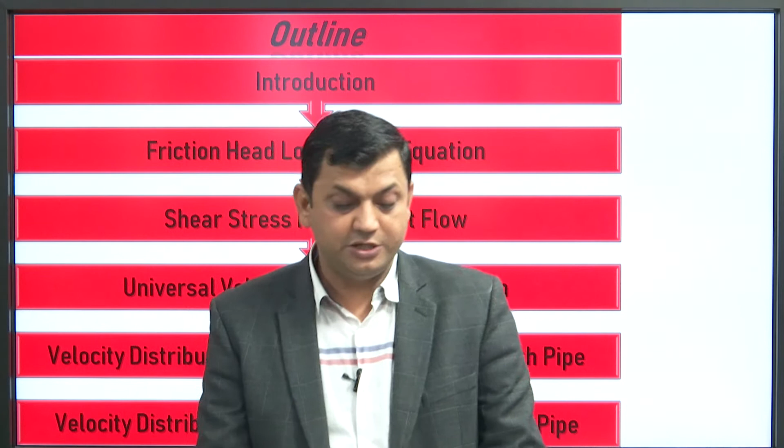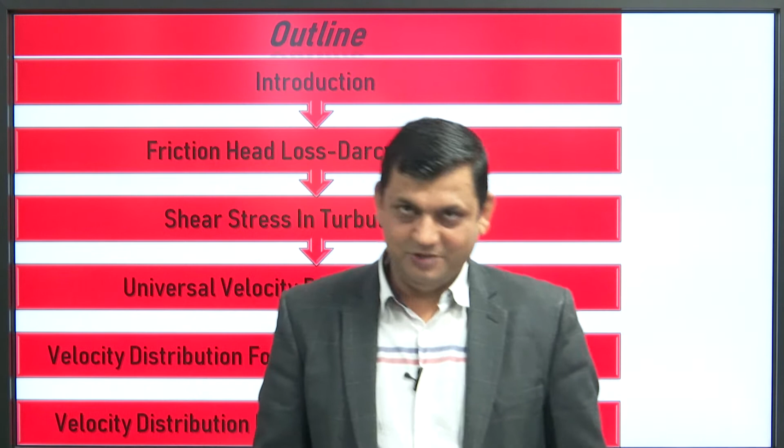Then the shear stress in turbulent flow. So many models exist, like in viscous flow we have Newton's law of viscosity, tau equal to mu du upon dy. In a similar way, we discuss what is the shear stress in turbulent flow.

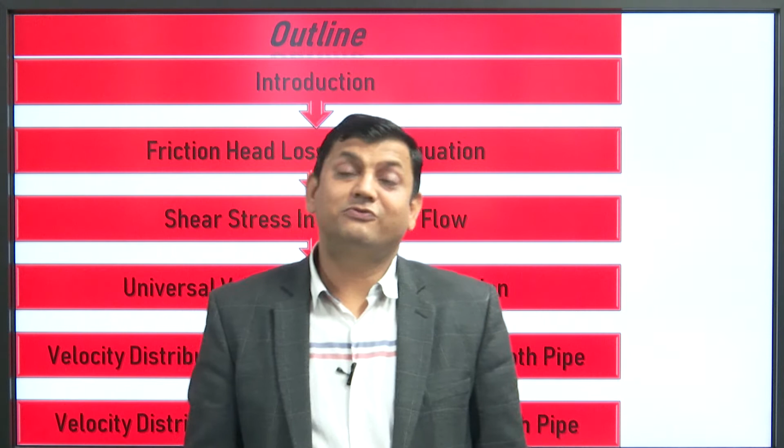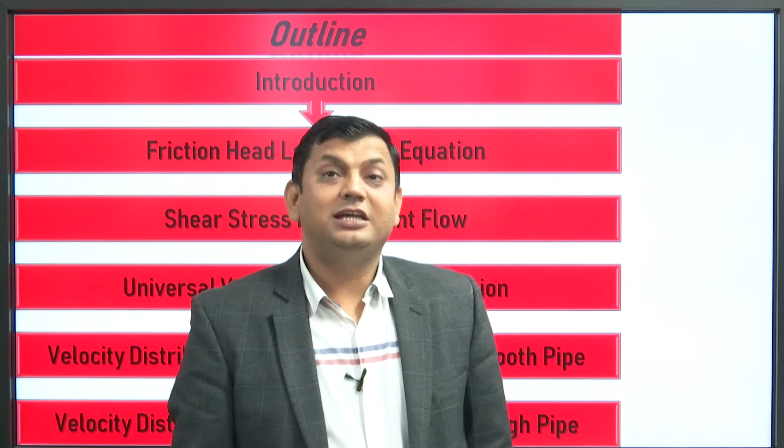Then the velocity distribution. So what is the universal velocity distribution for smooth and for rough pipes?

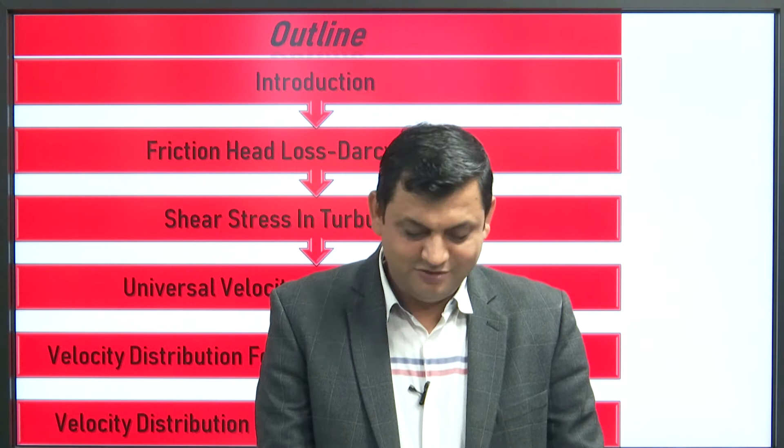In turbulent flow, fluid motion is irregular. In kinematics we discussed what is laminar and turbulent flow. We can say it is like a zigzag, like flood water, in turbulent flow. In laminar flow, the motion is a straight line along the stream, but in turbulent flow the motion is irregular.

So there is complete mixing of fluid. Why is there complete mixing? Due to collision of the fluid masses with one another.

Fundamentally, on the basis of Reynolds number we can categorize the nature of the fluid as laminar or turbulent. It is seen that up to 2000 or 2300 the flow is laminar, when talking about fluid flow in pipes. On the other hand, between 2300 or 2000 up to 4000 is some transition state - we cannot say for certain, sometimes it behaves like laminar, sometimes like turbulent.

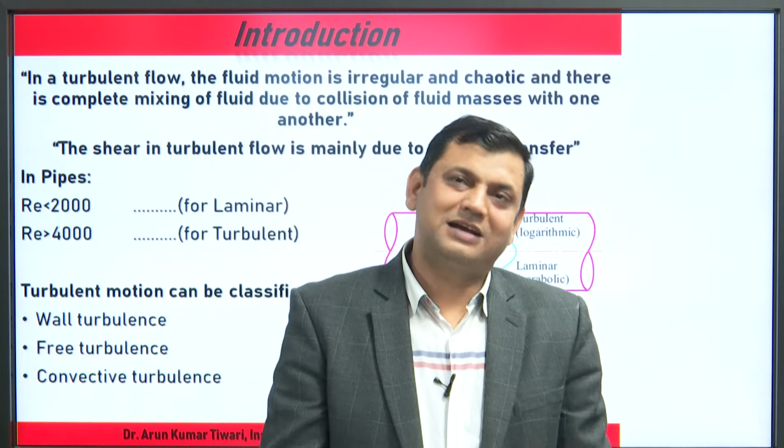In laminar flow we had a detailed discussion on the velocity distribution, which is parabolic in nature. At the center the velocity is maximum, at the boundary it is zero. We derived u equal to u max times 1 minus r upon R square, and u average equal to u max upon 2. We have solved some numericals using these fundamental equations.

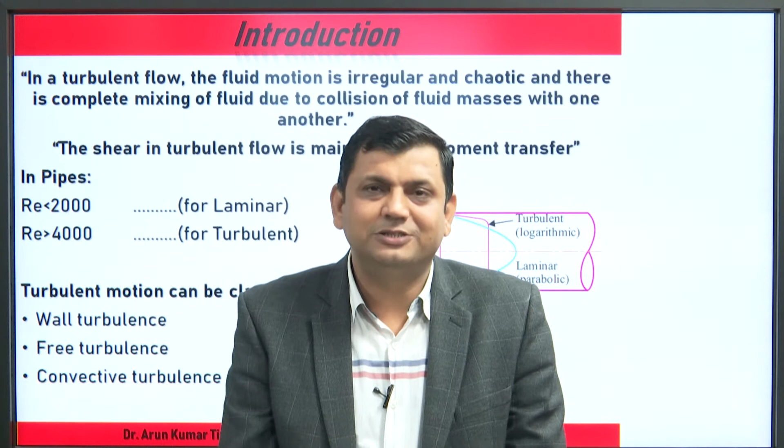Let's take the example of fluid flow through pipes. If you see the velocity distribution for laminar flow, at the boundary it is zero, maximum at the center, forming a parabola - u maximum, and the nature is parabolic. So this is the velocity distribution of laminar flow.

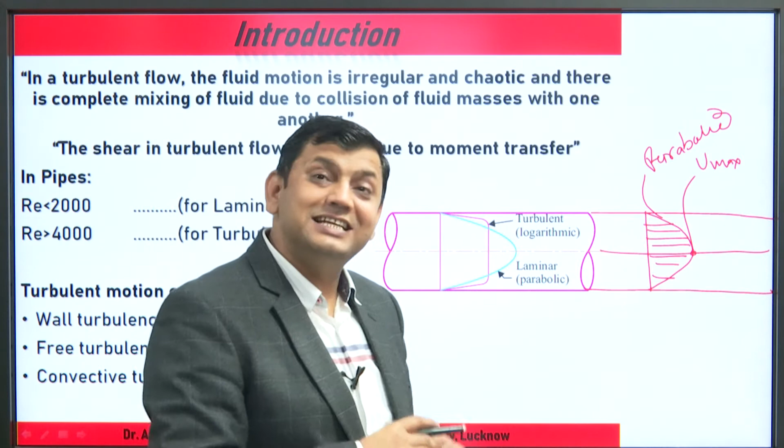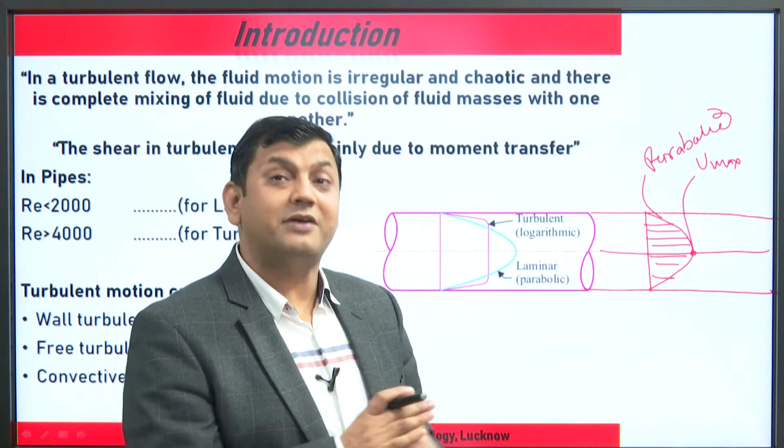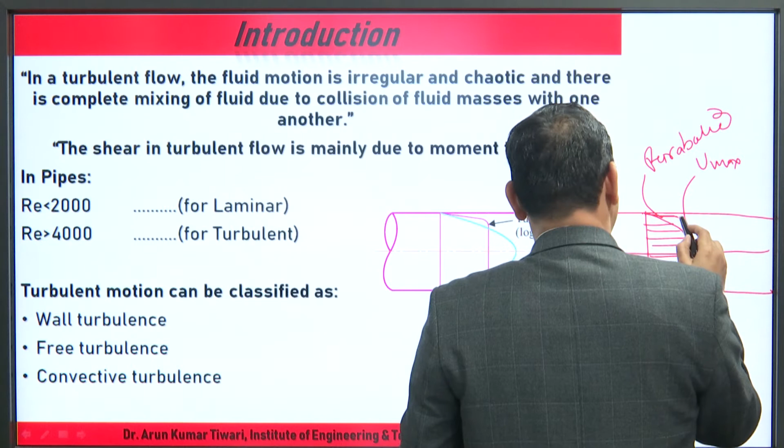What about turbulent flow? The nature is different - it is logarithmic, and depends upon the power law, y upon delta to the power 1/7th. The profile is flatter, not like the parabola. So this is the turbulent velocity distribution - flatter, following the power law, and logarithmic in nature.

So this is all about the velocity distribution of laminar and turbulent flow. Turbulent flow means zigzag motion with complete mixing. Very few real examples are laminar; in real practice, most of the flow is turbulent.

So on the basis of Reynolds number, which is inertia force upon viscous force, Reynolds decided this. Reynolds number is rho v d upon mu.

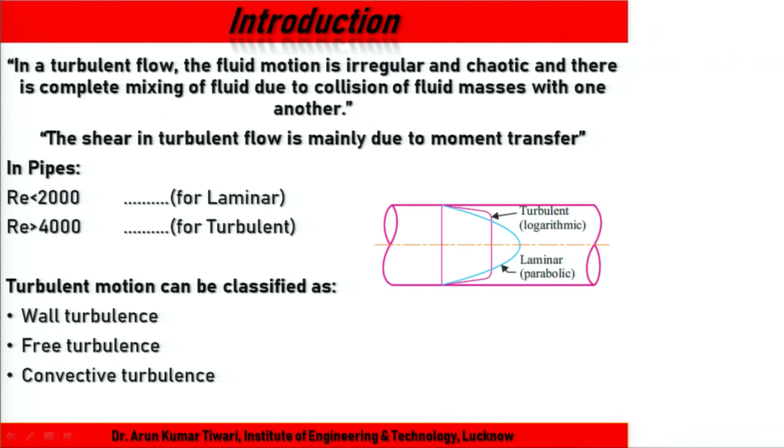If Reynolds number is less than 2000, then the flow is laminar; otherwise, between 2000 and 4000, this becomes the transition state - we can't say definitively which it is.

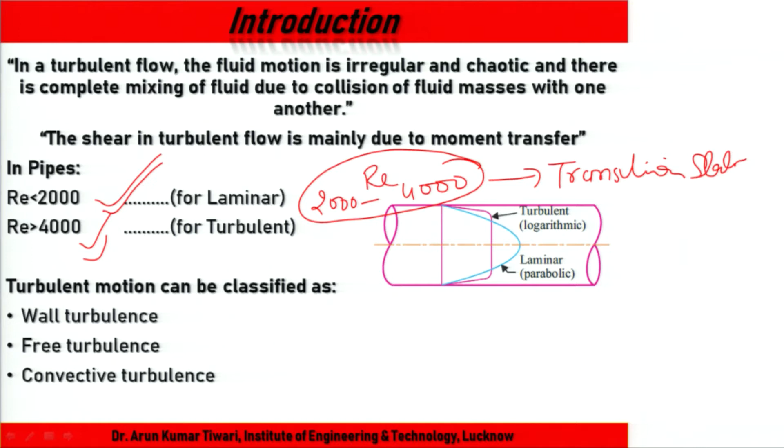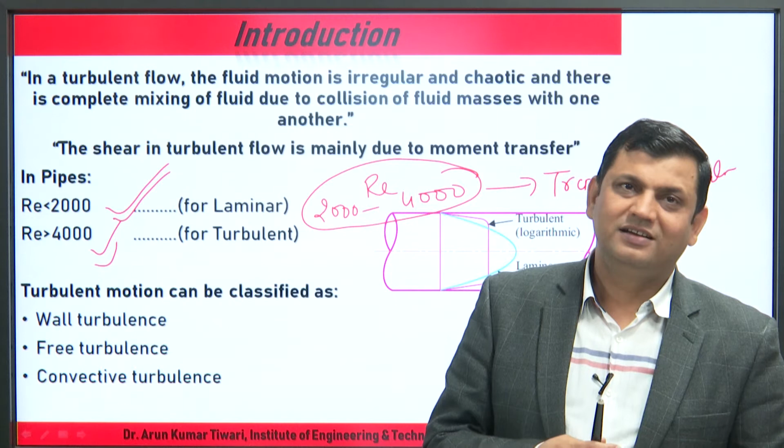When talking about turbulent motion, there is wall turbulence, at the wall level, and free turbulence, where mixing takes place. There is also convective turbulence, where conversion actually takes place - potential energy changing into kinetic energy. So these are the types: wall turbulence, free turbulence, and convective turbulence.

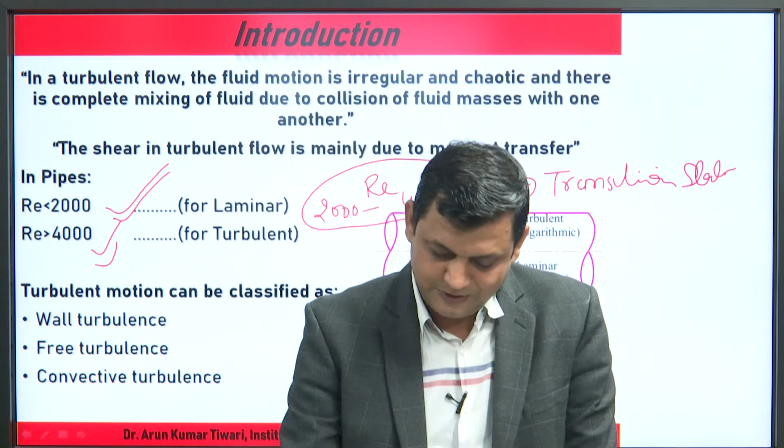If fluid flows through pipes, there is frictional resistance, and it is seen that it is proportional to V power n. What is n? It depends upon the surface material. In case of turbulent flow, n varies from 1.5 to 2, so the coefficient of V power n varies. The frictional resistance HF is proportional to V power n, but in case of turbulent flow, it is not simply V power 2.

It depends upon the surface area, but is independent of pressure, and depends upon the contact surface nature.

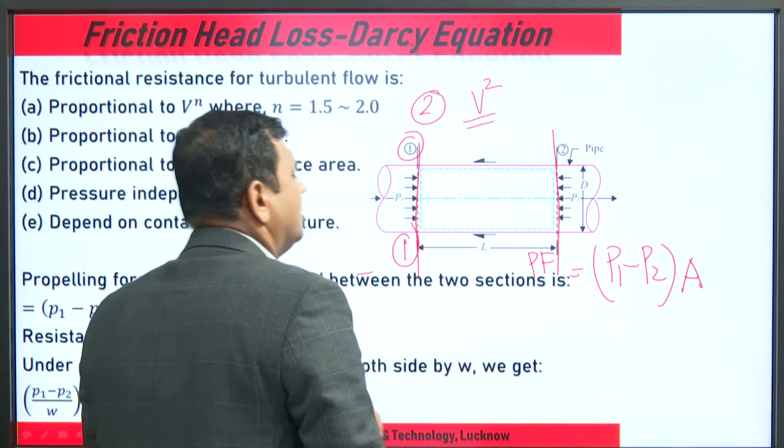What is the propelling force? It is P1 minus P2 into area, A. This is the propelling force of flowing fluid between two sections: P1 minus P2 into A, the area of cross section.

This propelling force is balanced by the resistance force, and the resistance force comes from friction.

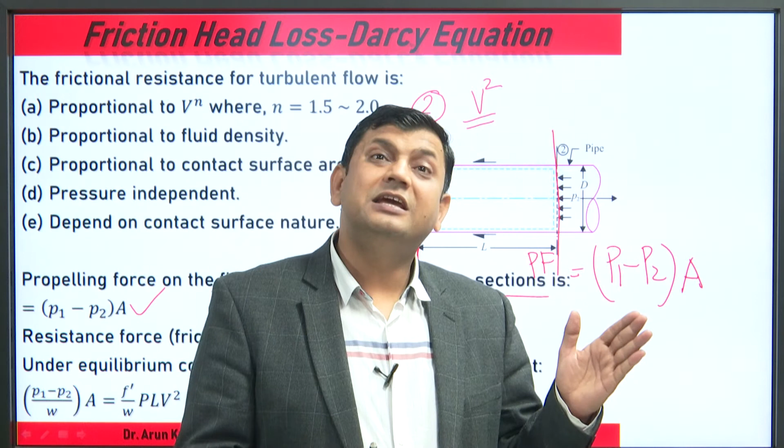This resistance force equals F dash, a non-dimensional term which depends on the nature and material of the pipe. The resistance force also depends on P, the wetted perimeter.

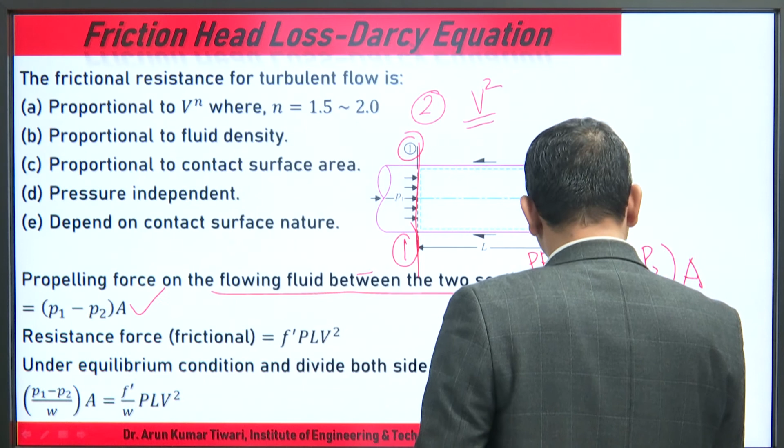So the resistance force is proportional to, or we can say equal to, F dash into P (wetted perimeter) into L (length of pipe), and in case of turbulent flow, into V square.

What is F dash? It is without dimension. So one force is P1 minus P2 into A, and this is balanced by the resistance force. Under equilibrium: F dash P L V square. This is the fundamental equation, equation 1.

In equation 1, one term is the propelling force, and the other term is the resistance force.

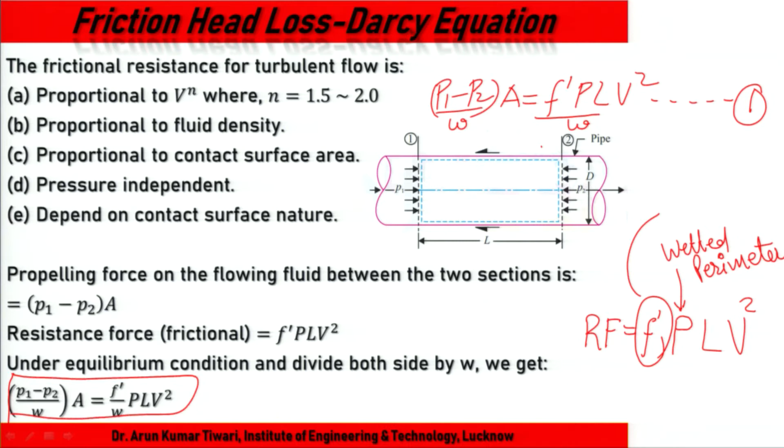This is very fundamental, so we move forward. Before that: P1 minus P2 upon W into A equals F dash P L V square upon W.

Again we can write: P1 minus P2 upon W equals F dash upon W times P upon A, times L V square.

This term P1 minus P2 upon W is the head loss, HF. So the head loss HF equals F dash upon W times P upon A, and we write this as HF.

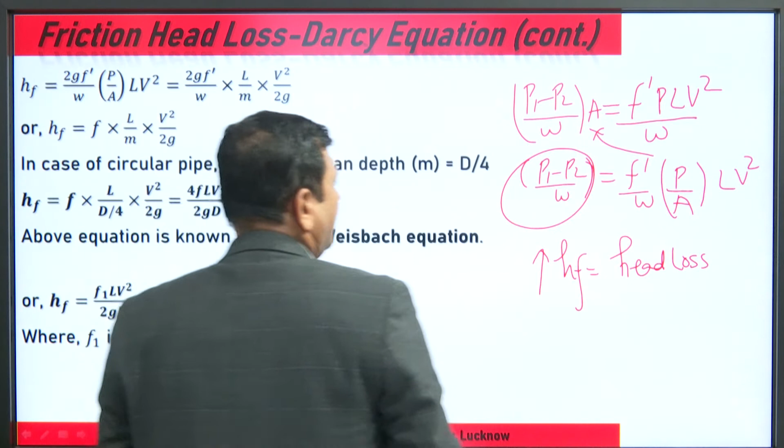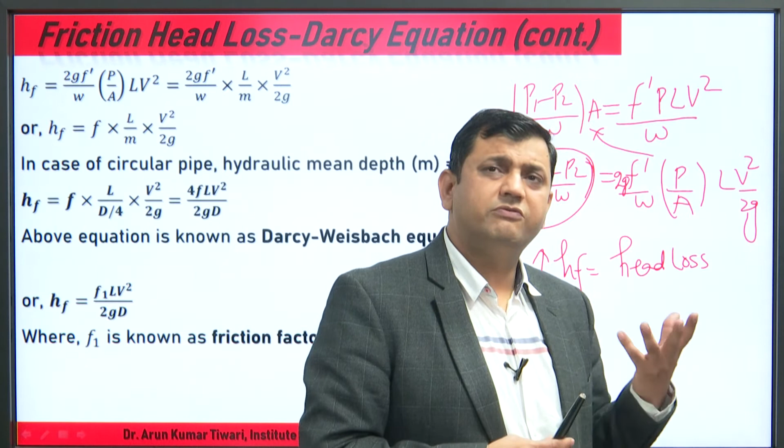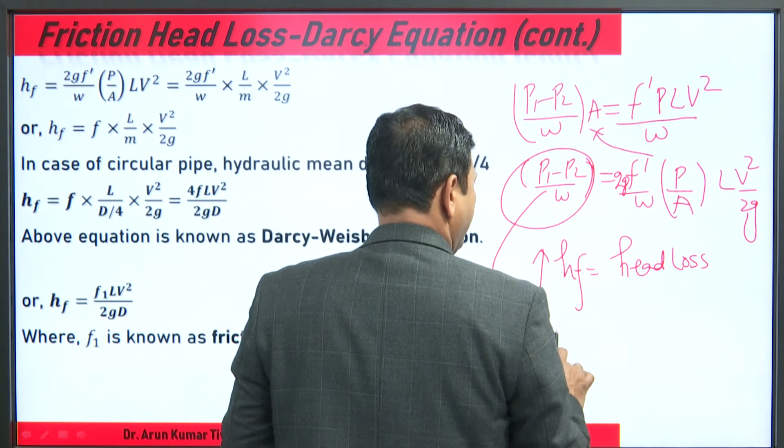Now we multiply and divide by 2G. Why like this? Because V square upon 2G, from Bernoulli's equation, is the form of the velocity head. So dividing and multiplying by 2G, we can write HF equal to 2G F dash upon W, P upon A, L, V square upon 2G.

This component, wetted perimeter upon area, is very important. We define this as M, the hydraulic mean depth: A upon P. For a circular pipe, A is pi by 4 d square, and the wetted perimeter is pi into d. The pi cancels, leaving d by 4, so the hydraulic mean depth M equals area upon wetted perimeter.

This, M, is the area upon wetted perimeter.

So, this value m: we can write P upon A, because A upon P becomes m, and reverse of that, P upon A becomes 1 upon m. So we can write L upon m, because L and 1 upon m become L upon m, and all the equation remains the same.

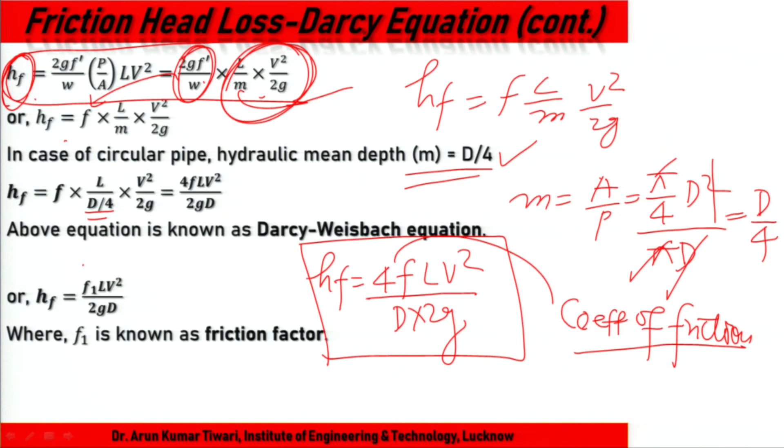And what is F? F is the coefficient of friction. In this equation, F is known as coefficient of friction. Sometimes in numerical problems, this coefficient of friction is replaced by friction factor. If this 4F is replaced by F dash, any F, then this F becomes friction factor. So sometimes in place of 4F we write F: F L V square upon d into 2g. This F becomes the friction factor.

We use this equation for calculating major losses in fluid flow through pipes. When fluid is flowing through a pipe, there are so many losses that occur. This major loss is due to friction, and this friction loss is calculated by the Darcy-Weisbach equation: HF equal to 4 F L V square upon D into 2G.

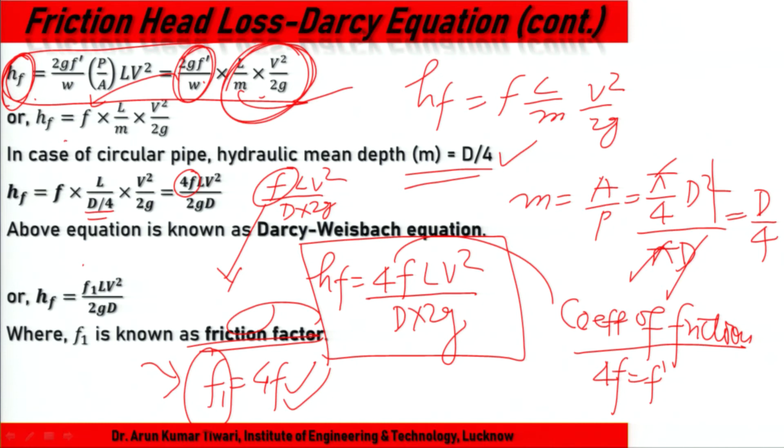Next, the coefficient of friction in terms of shear stress. What is the coefficient of friction, very fundamentally? The shear stress: the propelling force, P1 minus P2 into A, is balanced by the shear stress. In terms of shear stress at the boundary level, shear stress is shear stress. What is the surface area?

Surface area is pi d L, and this area is pi by 4 d square. So P1 minus P2 into pi by 4 into d square equals tau naught into pi d L. d cancelled, pi cancelled, so we can write P1 minus P2 equal to 4 times tau naught into L upon D. So this equation is derived by this.

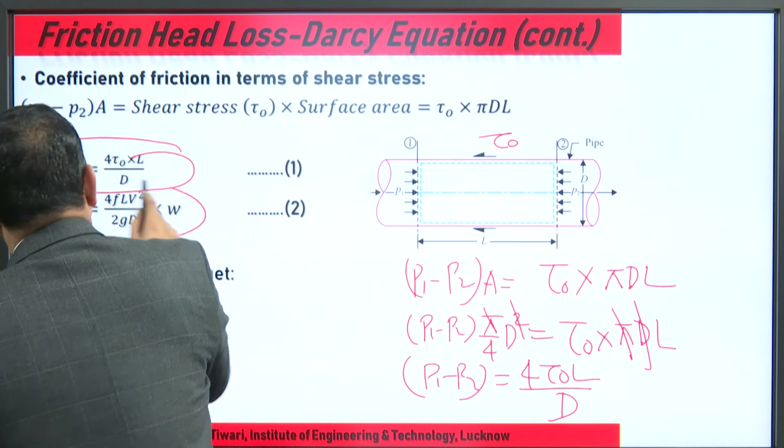Second is what is this by the friction loss. Yes, HF, you know the HF. What is the HF? HF is P1 minus P2 upon W. This is HF, rho into G.

And what is this? 4FL V square upon D into 2G. So we can write W, so this becomes P1 minus P2. Equating both equations, what are both equations? 4 tau naught L upon D equal to 4FL V square upon 2G into D into W. We can write W as rho into G.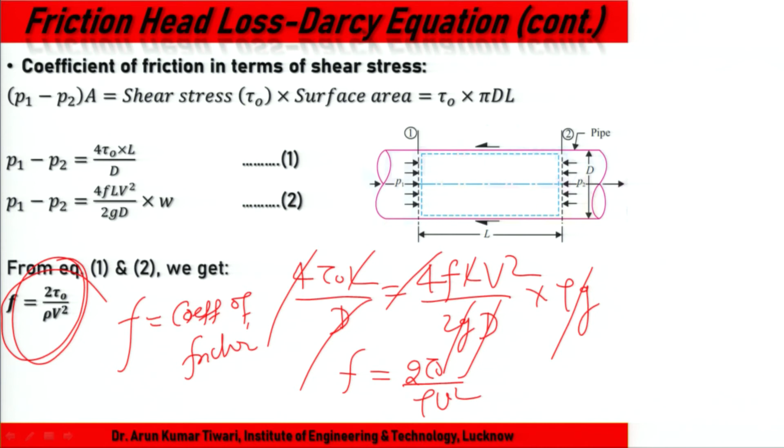So L cancelled out, diameter cancelled out, this cancelled out. We can write what is the friction factor? This 4, what is the friction factor? Friction factor equal to, so this G cancelled out, we can write twice only, twice shear stress value upon rho into V square. What is F? This F is the coefficient of friction. Coefficient of friction. So this one is the friction head loss.

Next is shear stress in the turbulent flow. How do you calculate shear stress in turbulent flow? In order to determine the magnitude of the turbulent shear stress, a number of semi-empirical theoretical models have been developed. The first model is the Boussinesq theory, where the total turbulent shear stress.

Total turbulent tau equal to viscous plus turbulent. And what is the turbulent component? This turbulent is neta, eddy viscosity, times the temporal velocity upon dy. So the turbulent shear stress tau t is added to the viscous shear stress. So the total shear stress is total: viscous plus turbulent, and viscous is Newton's law of viscosity mu du upon dy, plus neta du upon dy.

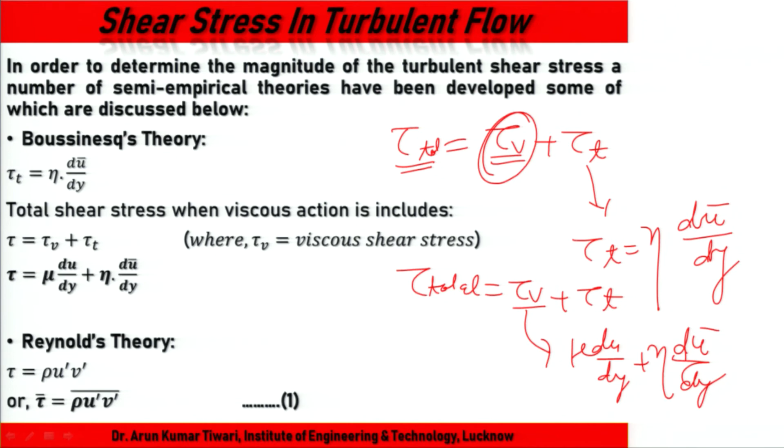Another is the Reynolds theory. If the amount of mass of water or liquid is fluctuating to the adjacent layer, then the fluctuating velocity is u dash, v dash. Then we can say shear stress tau equal to rho u dash v dash.

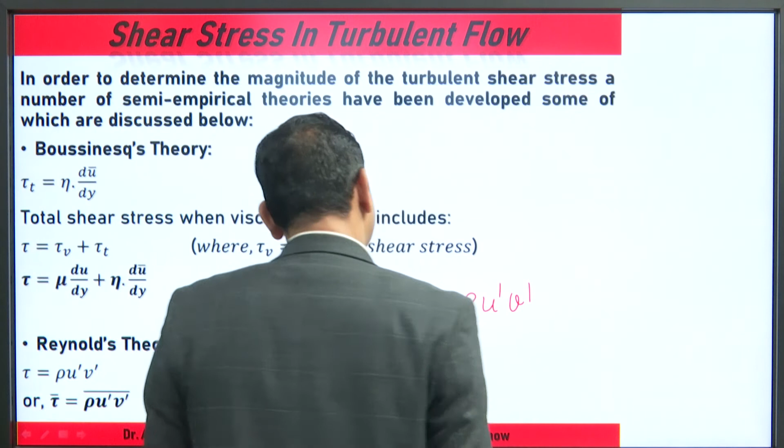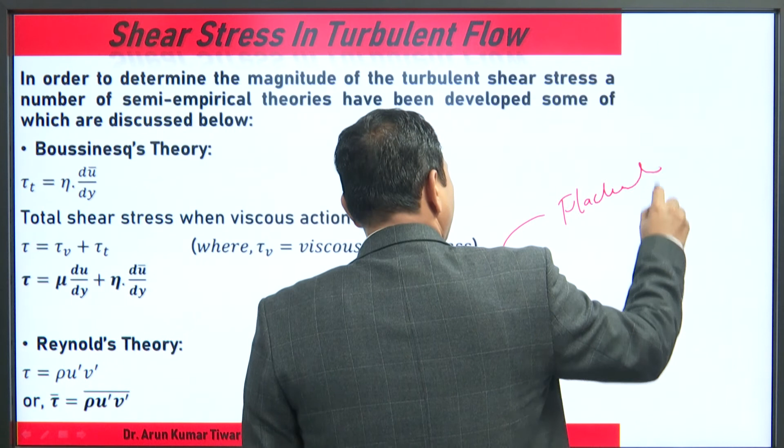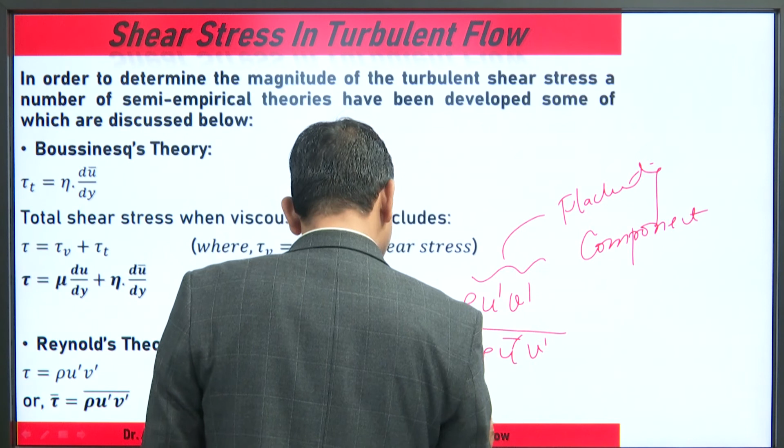Then the Prandtl mixing length theory. We know the Reynolds theory means Prandtl mixing: in the lateral direction, some mass of the liquid is mixing at the lateral length, the lateral part. If the lateral part, so we can calculate what are the components.

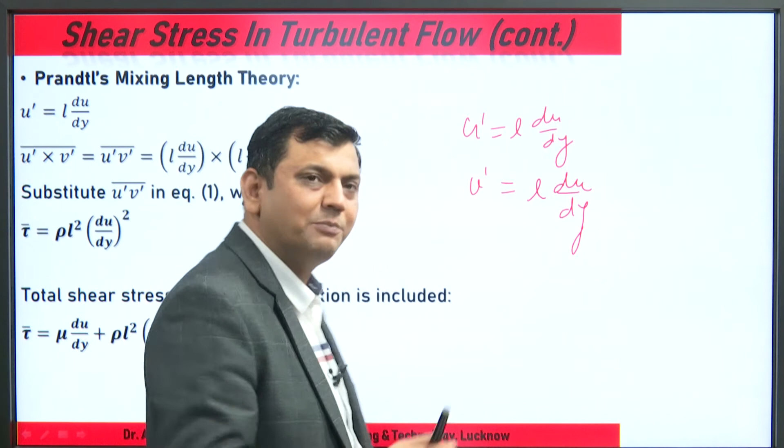Components: u dash equal to L, the particular length. So the fluctuating component u dash equal to L du upon dy. And what about v dash? Similar, same L component, lateral. Some mass, before gaining the new velocity, mixes over the lateral length. So if we multiply, this component becomes L square du upon dy.

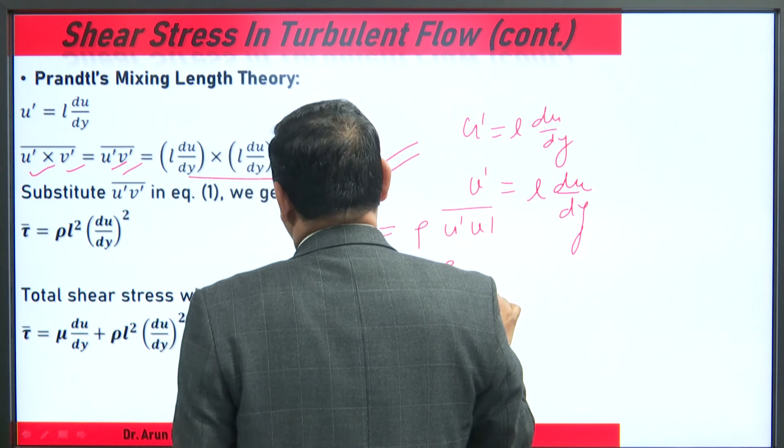Because we know the Reynolds shear stress, what is the Reynolds shear stress? This one is the Reynolds shear stress, rho. So if we multiply this component, rho multiplying this component.

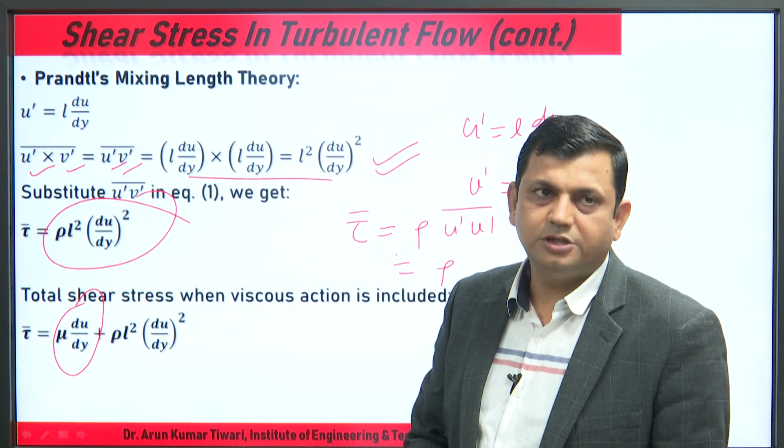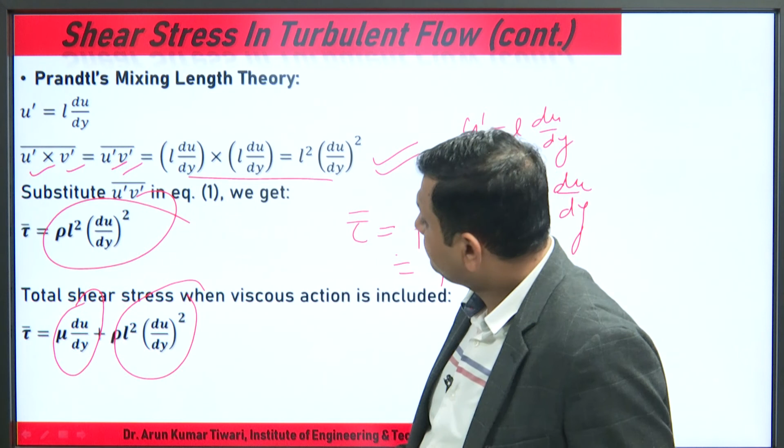So what is the total shear stress? The total is adding the viscosity component, the viscous component, and this component. So the total is, we can say like this.

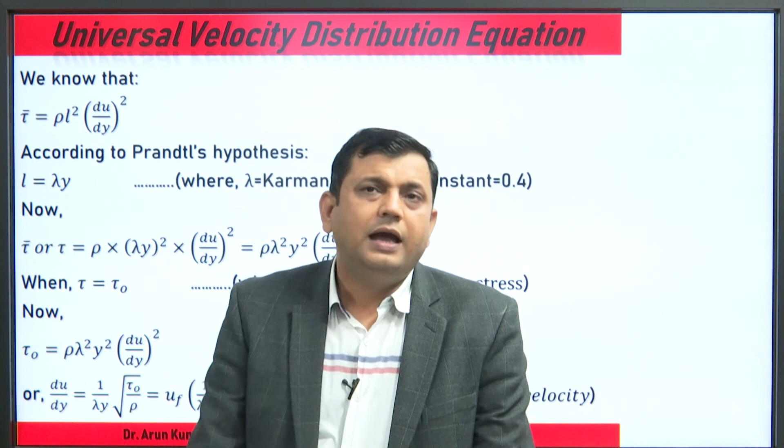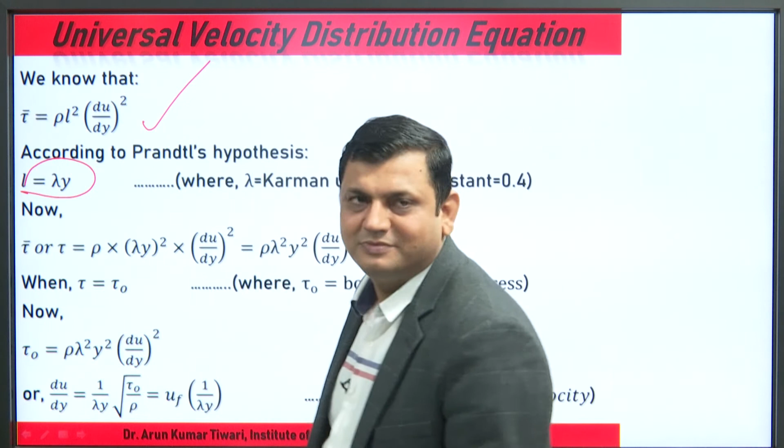If you see the velocity universal velocity distribution, this is the Prandtl. You know L equal to this value, this was the Karman constant.

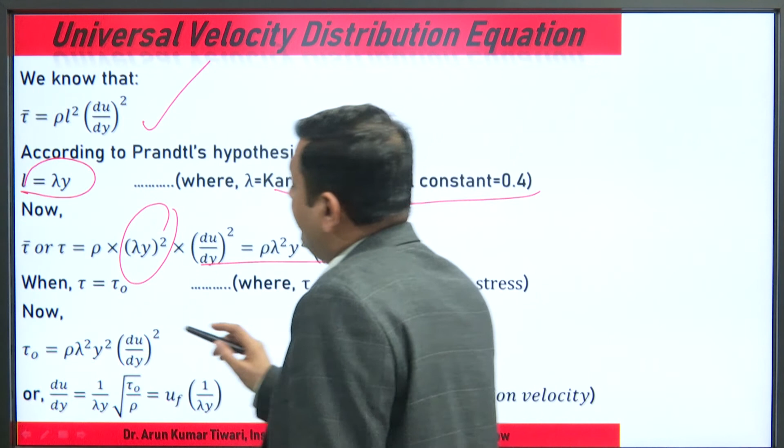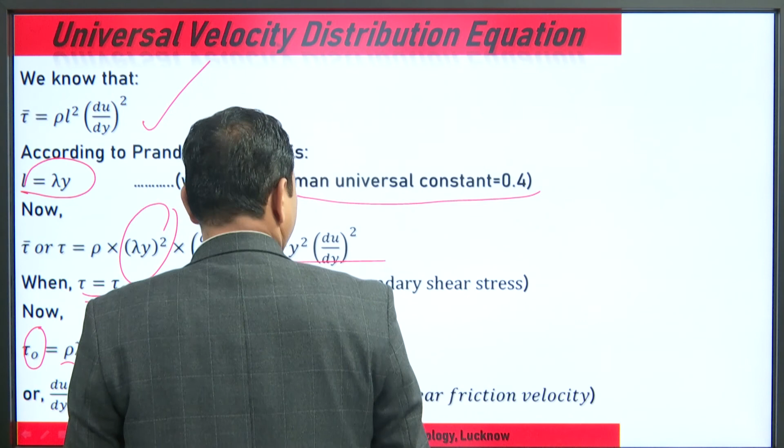So shear stress again squaring, at the boundary level shear becomes shear naught. So putting tau naught equal to, calculating du upon dy, this becomes du upon this term. And what is this? So this becomes uf, and what is uf? Uf equal to shear stress upon rho, shear friction, this friction.